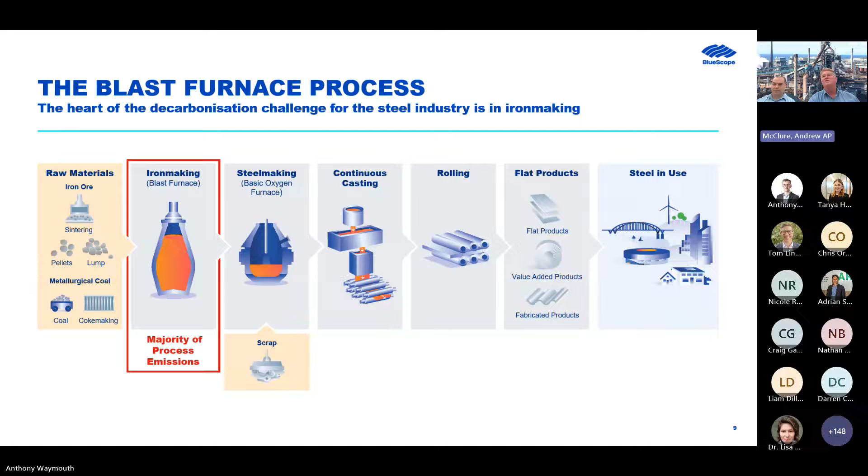And then long term, and Ian's going to talk a bit about the long term today, looking at direct reduced iron, and maybe some of the other things as well, but also the enablers that can help us get to that future technology pathway.

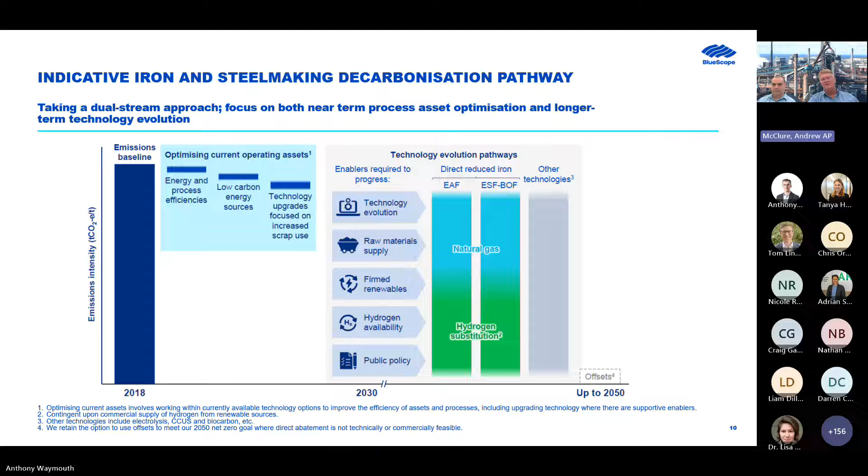Next, please. So now I'm going to talk about the project that we did with ARENA support to look at what things we could do on our decarbonisation pathway.

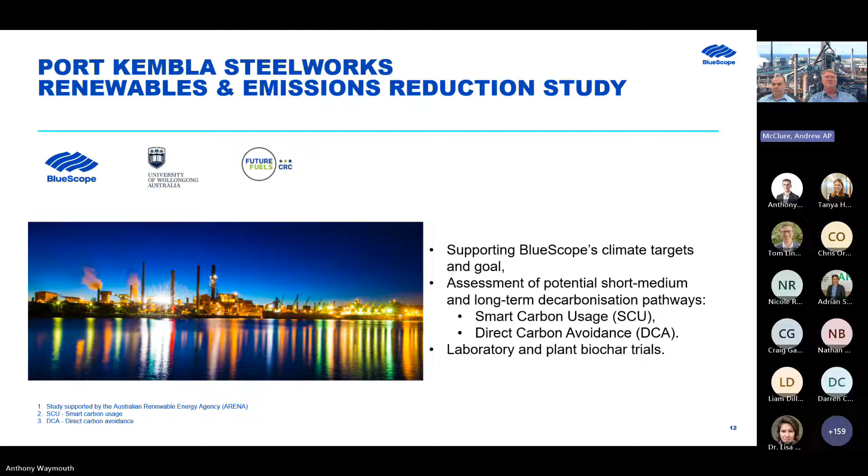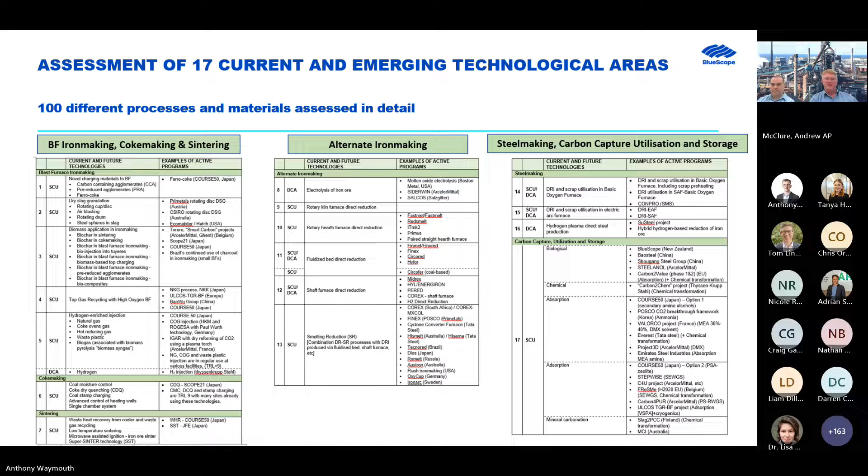Of course, we had over 100 different technologies to look at, and we worked to reduce that fairly quickly. We looked at the short term, in the sort of 15-year time frame, and because of that, we were able to say that if something's got a really low TRL, it probably means it's going to take 5, maybe 10 years to get going, which would impact its ability to help us in that short to medium term. Likewise, in the long term, we were really looking for technologies that would significantly reduce our emissions, and that helped us reduce the options we needed to assess further.

We got down to about 20 technologies that we then moved into doing detailed assessments on. We looked at the detail of each of those, but also at the operations, engineering, safety and environment aspects, and that helped us look at what we might do going forward at Port Kembla.

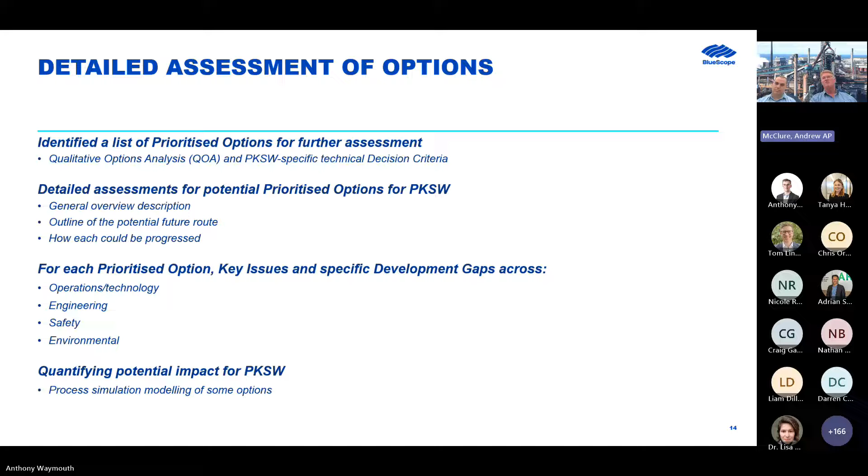Also, as part of the detailed assessment, we did some work on a simulation model, looking at options around hydrogen, coke oven gas injection, and different types of biomass. So we looked at biochar and also a torrefied charcoal type process, just to see how those injectants into the blast furnace would work, what the emission levels might be, and what levels we could actually inject into the furnace.

Out of that work, we've identified a few items to look at, understanding that we don't have unlimited resources. I suppose the three short to medium term ones are: looking at the potential to use HBI, hot briquetted iron, in the blast furnace, which we've picked up from the likes of Kobe Steel, who have done work using that for overall emission reduction in the blast furnace operation; looking at biomass, particularly biochar; and also wishing to look at more scrap utilisation in our operations, particularly in the BOF, an area where we've done a lot of work already but see more opportunities.

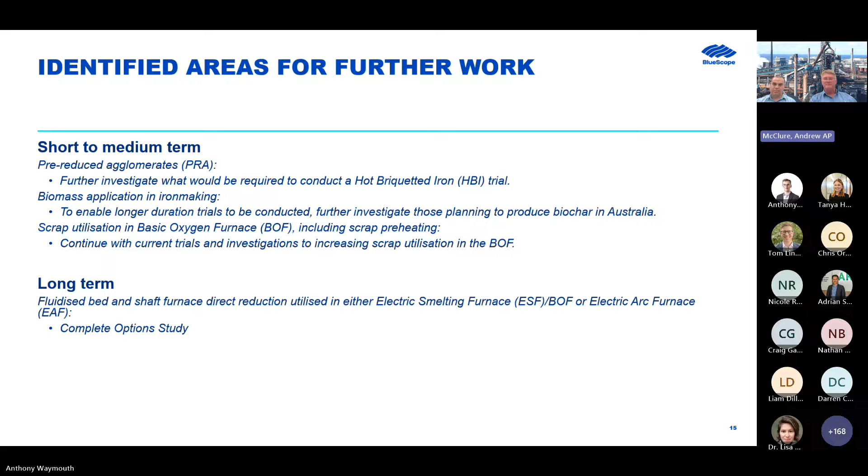In the long term, we are really focused predominantly on the direct reduction of iron, and Ian will talk a little bit about that.

As I mentioned, one of the focus areas for the study was around biochar use as a replacement for the pulverised coal we use in the blast furnace. A very quick explanation: we use coke and coal in the blast furnace. The coke is fed in through the top, and it's a very important part of the iron making process, helping the blast furnace breathe as material works its way from the top down to the bottom, and also providing the reductant and energy within the furnace. More recently, we've been able to use coal and inject it into the base of the blast furnace, which has been very effective in adding energy and also acting as a reductant.

So the idea of the biochar work was to pick up on the previous work that we had done with Worldsteel CO2 Breakthrough Project, which identified that biochar could work, particularly in PCI, but other areas too. We focused on PCI, and as part of this project, with Arena's support, we procured 1,000 tonnes of biochar. That was quite difficult - there's a limited amount of biochar, and certainly not a bulk supply of biochar in Australia, but we got 1,000 tonnes.

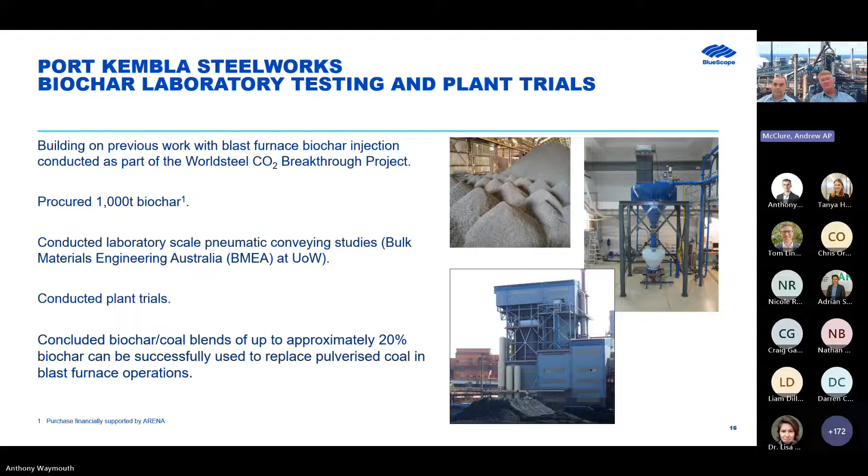So that's the biochar side of things. Next, please. So Ian's now going to talk about some of the future work we are doing, looking at that long-term decarbonisation pathway. Thanks, Andy.

Yeah, so I thought I'd just start quickly with the background of some of the different steelmaking technologies. I hope this is of interest to most people. There's really three main routes, and the dominant route worldwide is the blast furnace or integrated steelmaking route - that's approximately 70% of steel made with that route.

The other primary steelmaking technology is the electric arc furnace, where scrap is remelted to make steel - that's often called secondary steelmaking, and it's about 23%. The third option is direct reduced iron, which a lot of people are interested in at the moment, especially with using hydrogen. DRI is used pretty much where natural gas is cheap, which is in the Middle East and North America.

This ratio is very dependent on geography, I guess. In the US it's about 70% EAFs, and in China it's about 90% blast furnaces, due to the maturity of the country's industry, I guess. So there's more scrap availability in the US. Next slide, please.

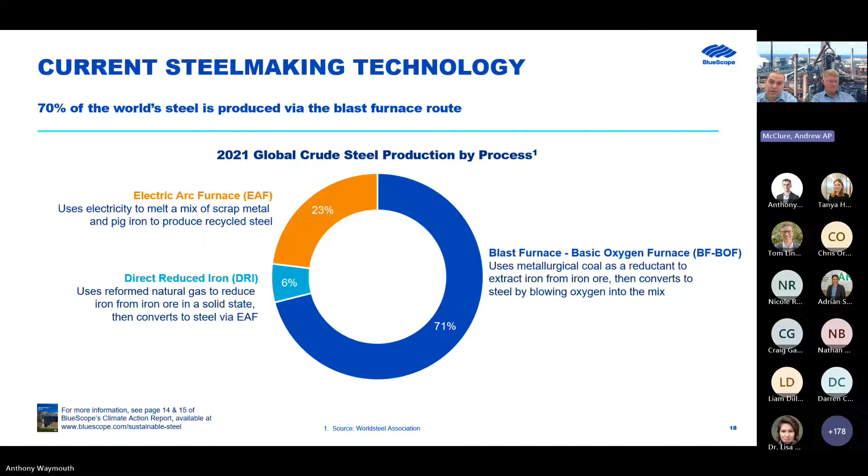The other mature technology is an electric arc furnace, which depends on the electricity greenhouse gas intensity. So depending on the amount of renewables in the grid, it's quite a lot less, from about 1/3 to 1/4 of the greenhouse gas intensity.

One of the big questions everyone asks is, why don't we at Port Kembla switch to an electric arc furnace? The simple answer is, we don't have enough scrap. We currently do import some scrap even now.

Looking forward, there's two different options. The most common one is DRI straight to an EAF, which needs magnetite, a little bit more expensive and less common. The option we're pursuing in partnership with Rio Tinto and BHP is DRI, an electric smelting furnace, and a BOF. The two advantages of that option are cheaper raw materials, and secondly, utilising existing infrastructure - we already have a BOF.

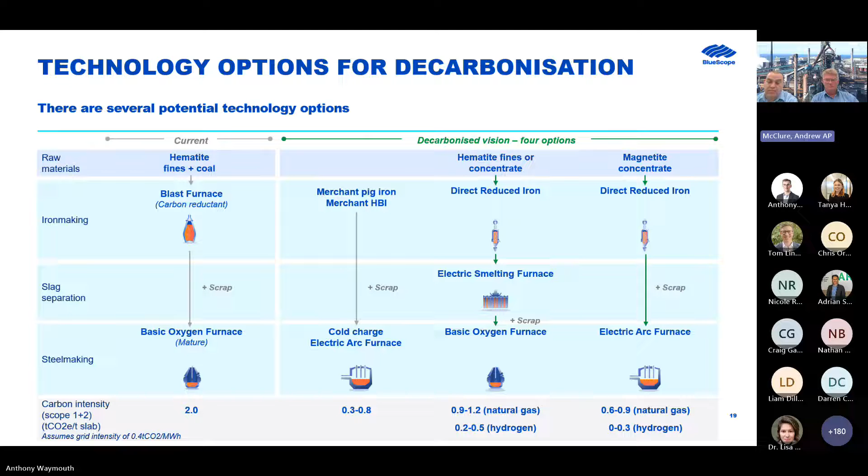Just to highlight this situation, the world needs primary steel, and it's going to need more and more steel over time. So there is a gap between the amount of scrap and the amount of steel we require. If someone converts to an EAF, someone else will have to produce more primary steel.

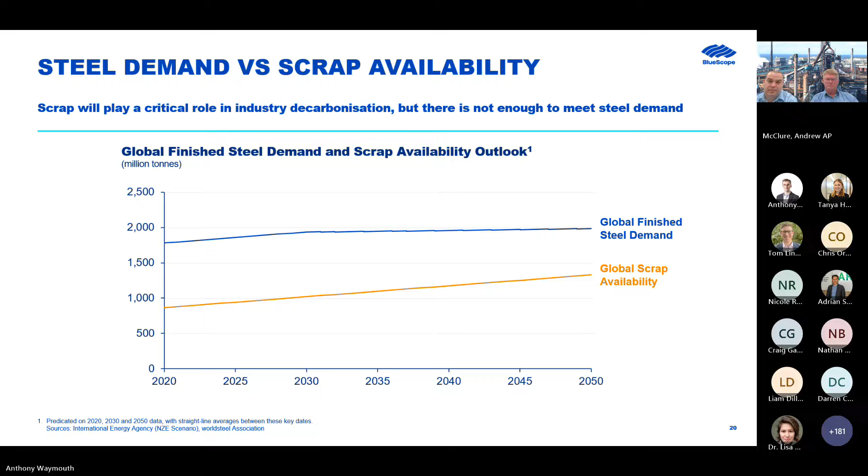It's been announced fairly recently that we're working with Rio Tinto and BHP to produce an electric smelting furnace, ESF. The whole idea is to trial Pilbara ores, using hematite Pilbara ores, in an ESF, which hasn't been done before, and it is really essential going forward. We're in very early days, but we're working through that at the moment.

I think this is the last slide, and it's a little bit controversial, but the reality is that natural gas DRI is a huge step down from a blast furnace BOF process. Hydrogen may well be the final step, but we don't want the perfect to be the enemy of the good, so to speak. You can get a 50 to 60% reduction moving from a blast furnace to a natural gas DRI process. That's the focus for us at the moment.

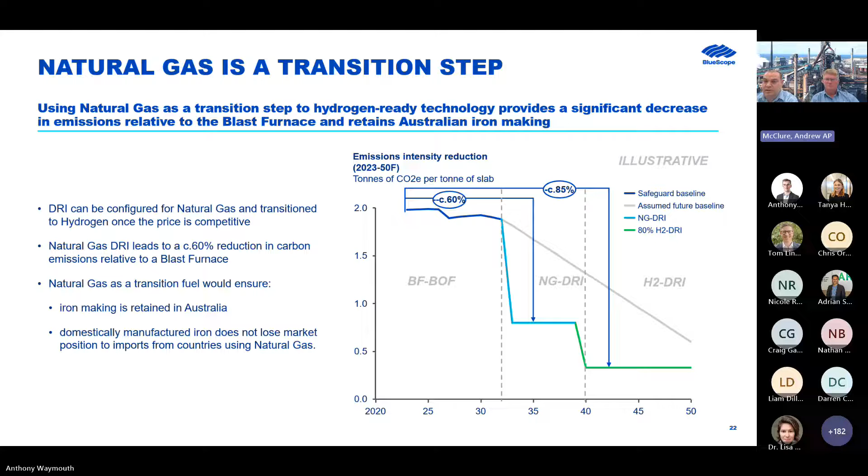And it's been talked about before, but for steelmaking, natural gas definitely is a transition fuel. It's something we really need to work towards, which is natural gas availability.

I have been working on biochar. It's probably half my role at the moment, trying to work out a source of biochar. It's a really easy option for us in that we don't have to reconfigure the existing steelmaking process.

The trial was very successful, as Andy mentioned. We had a 30% blend for 24 hours. That's not to say we can use it every day of the week, but it's certainly a very good thing, and it does make a significant reduction in our greenhouse gas emissions. At the moment there's no supply chain, as Andy mentioned, but we're working with several partners to try and make that happen.

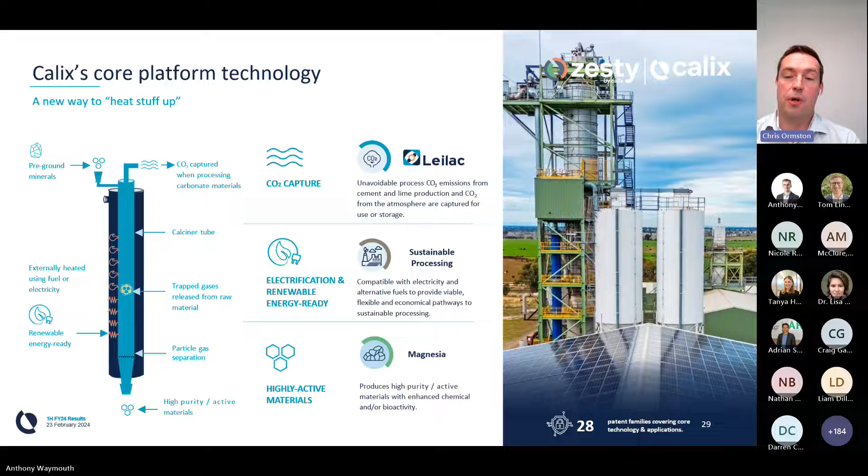Our platform technology is simply described as a new way to heat stuff up. The process vessel, or calciner tube, as you can see on the left there, is indirectly heated using fuel or electricity and is also renewable energy ready. Our facility here in Bacchus Marsh in Victoria is equipped with solar panels with sufficient capacity to fully power the pilot plant on renewables. In the process, pre-ground minerals are introduced to the top of the calciner and float down through the tube, enabling the thermal reaction to take place. High purity or converted materials exit the base of the tube, and any process emissions or off gases are captured from the top, depending on the application.

We've got multiple technology applications under various stages of development within the business. On the left-hand side, you can see a commercial magnesite operation here in Victoria, Australia, running since 2013. We also have our Leilac business processing cement meal and limestone, with facilities commissioned in Belgium in 2019. And of most relevance to today's discussion, we have our pilot facility in Victoria that's been used to develop the processing of various minerals, including manganese, spodumene, calcined clays, alumina, and in particular, iron ore fines by means of hydrogen reduction, which is the Zesty technology we're talking about in this presentation.

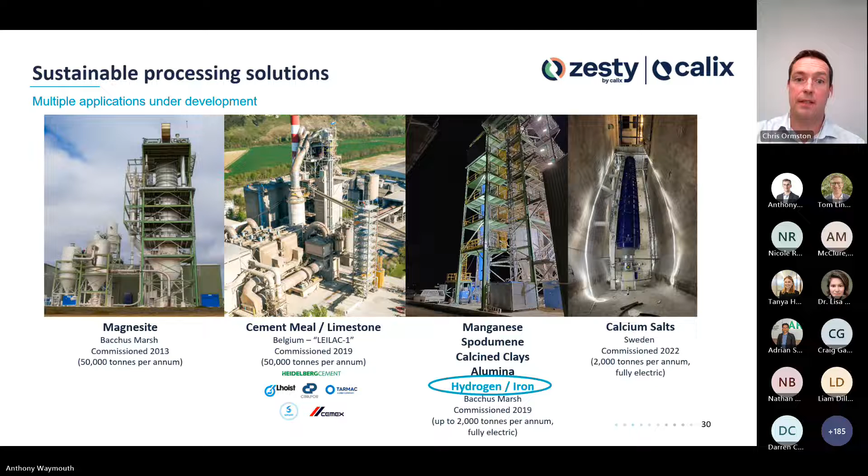So decarbonising iron and steel is a huge challenge, as mentioned in the previous presentation, with significant international focus. 8% of global CO2 emissions come from processing iron to make steel. 80 to 85% of those emissions come from the iron reduction step. And 53% of global iron ore supply comes from Australia, and within that supply, 96% of Australian iron ore is hematite.

So this highlights the relevance of the study work we've done to enable the development of a zero emissions iron and steel reduction technology that we call Zesty. So what is Zesty?

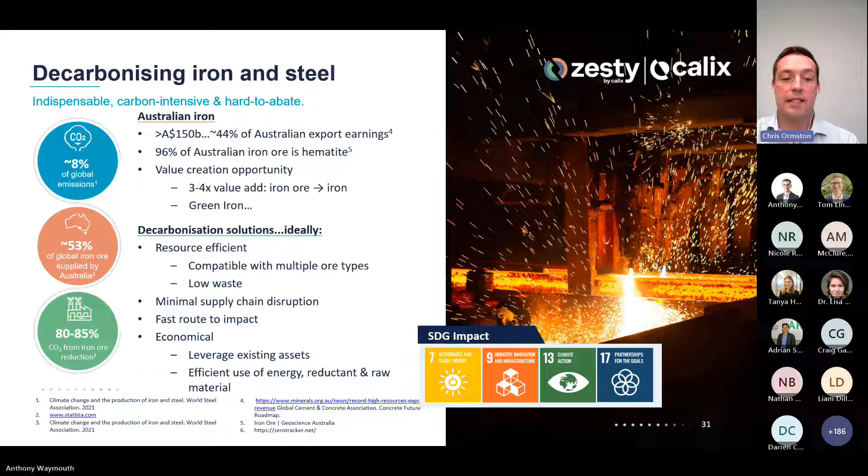Zesty utilizes the platform technology we have within Calix, described earlier, with the introduction of hydrogen to reduce iron ore. The process can be easily renewably powered. The indirect heating enables hydrogen to be used for reduction only, no combustion.

It's a fines-based process. The fines are introduced at the top of the process, and the hydrogen is introduced at the bottom and moved upwards. As the hydrogen moves through the vessel, it strips the oxygen from the iron ore as it passes in counterflow. The product exiting the process is a direct reduced iron product that's consumed in downstream steelmaking processes.

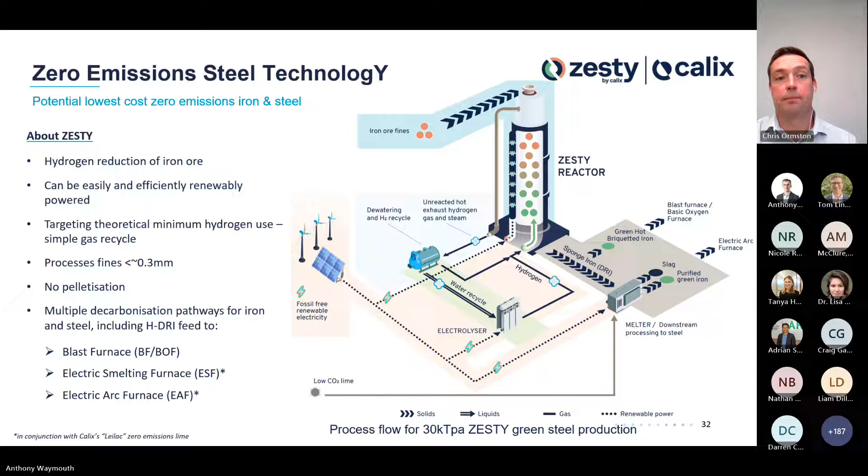Zesty technology is relevant to the entire steelmaking process. It can help decarbonize multiple processing pathways that utilize DRI, whether that be blast furnaces, where research has suggested that DRI can be used as 25 to 40% of the iron input, as Andrew mentioned in the previous presentation when discussing different feed mixes for blast furnaces going forward.

And also electric arc furnaces, where a combination of DRI and scrap can be utilized. As explained by Ian previously, the incoming ore type and quality is key here, given the operational tolerances of an EAF.

The Zesty process is less energy intensive than conventional iron making processes and has a much lower emissions intensity, due to the absence of fossil fuel-based fuels traditionally used for heating and reduction.

So I hope that provides you with an overview of Calix and where the technology fit is in the topic today regarding the feed study. Moving on to our feed study.

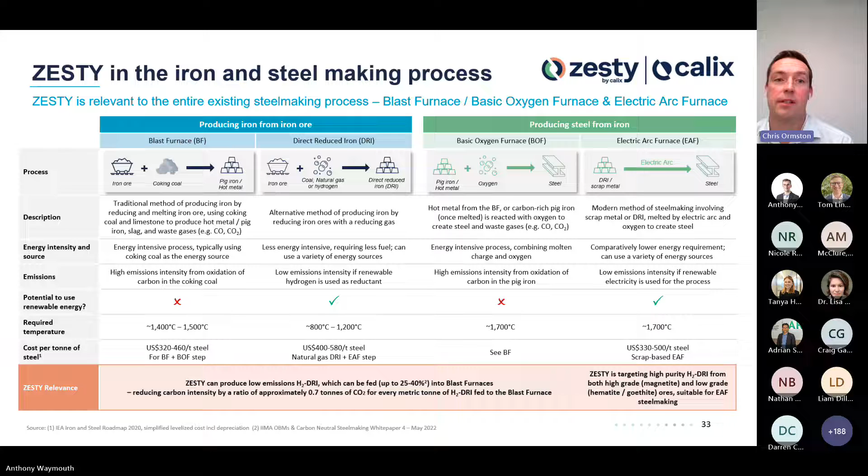The objectives of the feed study were to develop the engineering and design to a feed standard to deliver a 30,000 tonne per annum Zesty hydrogen direct reduced iron demo plant. This engineering and design has been supported by an expanded ore testing program at the Calix pilot scale facility in Bacchus Marsh, Victoria.

The purpose of the study was also to advance technical and commercial readiness of an alternative hydrogen-based DRI technology, and to deliver an estimate of the levelized cost of producing briquettes of hydrogen-based DRI using iron ore fines of low grade hematite or hematite goethite blends, typically found in the Pilbara here in Australia.

The objective of these studies is also to provide further knowledge to industry regarding the available H2 DRI technologies, and also to develop capital and operating costs that can inform the process for Calix to reach a final investment decision to go ahead and build the 30,000 tonne demo plant here in Australia.

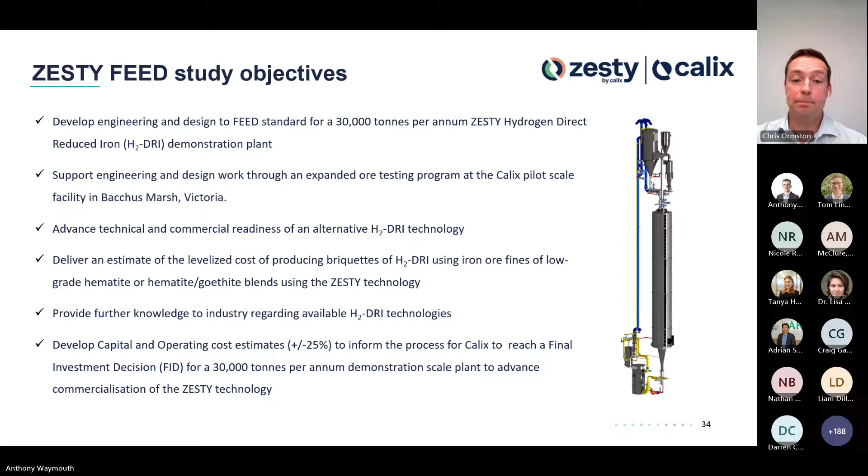Zesty can also reduce the emissions intensity of reducing iron ore the conventional way from around 1.89 tonnes of CO2 per tonne of iron to close to zero in certain applications.

Zesty has the ability to bypass traditional pelletizing, sintering, and agglomeration methods, saving considerable capital and operating expenditure. There's low consumption of green hydrogen because we don't use hydrogen at all for combustion, due to the indirect heating of the vessel. The hydrogen is only used for reduction, and hydrogen that isn't consumed can be recycled through the process. The indirect electric heating is a highly efficient heating method.

The Zesty process economics are expected to improve further as we scale the technology and reduce capital intensity, including the cost of carbon, which would further enhance the economics as those carbon costs are further developed in different parts of the world.

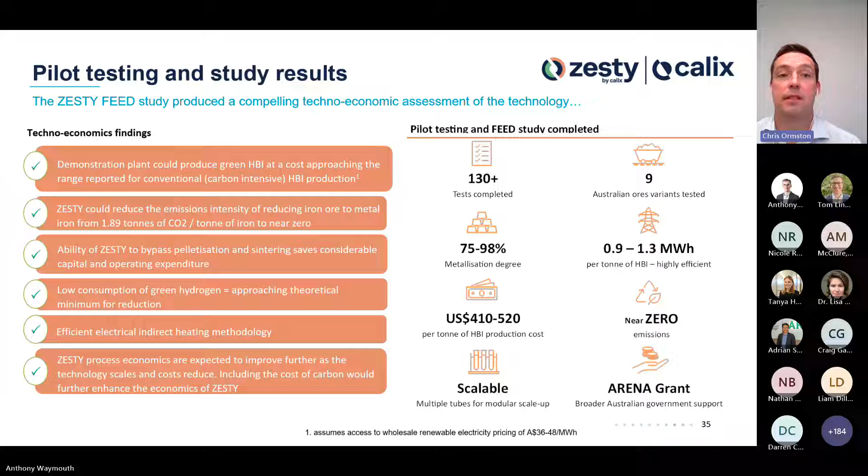There's always a few outlier results when undertaking testing, and these are typically associated with testing a few of the variables, making some tweaks in a pilot facility, such as changing the...

Temperature or the hydrogen flow rate. So we did 130 tests across 9 different ore supplies. We achieved metallization up to 98% in the higher case.

We used a range of low-grade ores as low as 53% iron. We processed iron ore fines with a range of 50 micron to 500 micron. The system can be tuned.

There's a number of conditions we can adjust to achieve commercial grade hydrogen-based DRI. Our pilot scale facility is an 18-meter vertical tube, and we've calculated that the demonstration facility would be around about 36 meters. It's worth noting that the pilot facility we have in Bacchus Marsh has not been custom built for hydrogen reduction. It's been used, as I mentioned earlier, as a multi-purpose facility for different mineral applications.

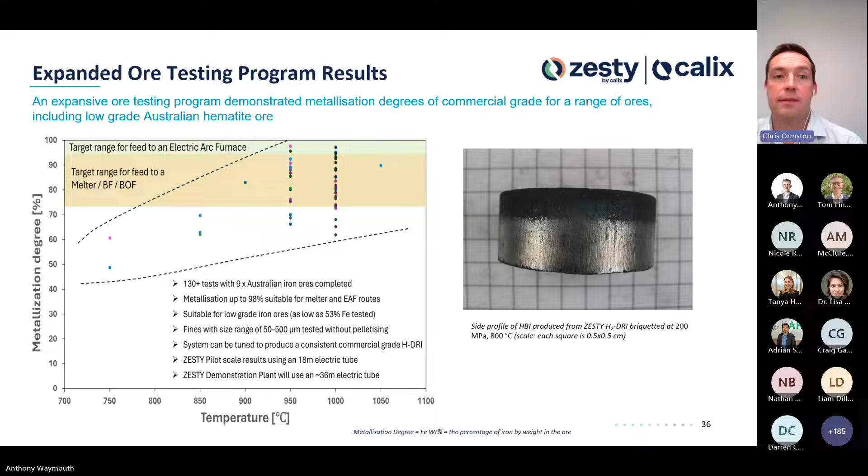So other key highlights and findings from the study confirm a process system with flexibility designed to accommodate a wide range of iron ore feedstocks.

Zesty's low cost of production is driven by efficient hydrogen use, efficient electrical heating, and the elimination of additional steps to achieve an H2 DRI product.

The feed study and cost estimations considered two operating scenarios. One would be over-the-fence supply, so a potential location near hydrogen hubs being developed within different states of Australia, but also the fallback alternative of an in-house electrolyzer within our own project development.

Total energy requirements of the process are projected to be 4.2 to 4.6 megawatt hours per ton, inclusive of the hydrogen production requirements. Hydrogen production requirements are approximately 75% of total power, with the remaining 25% used for the indirect heating of the vertical furnace.

We've also undertaken sizing and specification of the roller press to allow production of HBI, as you see from the samples we've generated. Those products can be tested in downstream steelmaking processes. As I mentioned, the initial briquettes are highly encouraging.

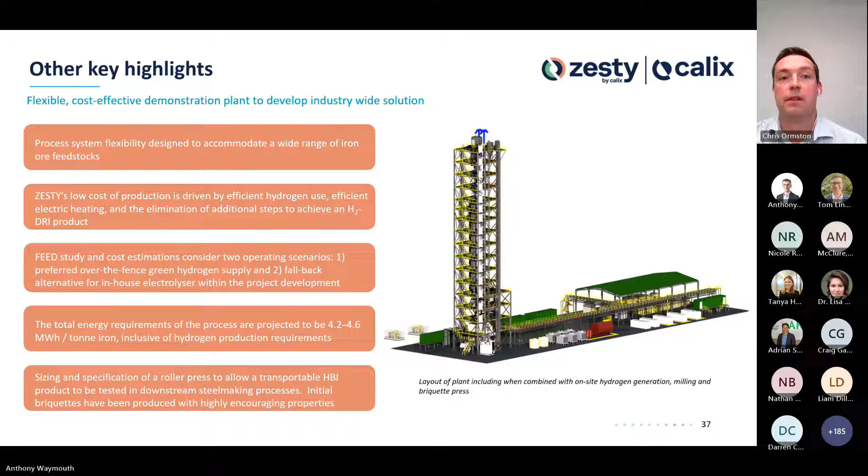So the feed study program has been a critical activity for us towards FID for the 30,000 ton facility. Why 30,000 tons? We see a 30,000 ton nameplate as a representation of a full-scale implementation of a single reactor tube, and that will...

Form the basis for further scale-up, which is essentially repeatable modules in multi-tube configurations. The demonstrator will be capable of producing significant volumes of hydrogen-based DRI for further downstream testing in the steel production value chain.

And this demonstrator provides a great opportunity to align with other downstream melting developments, as described in the previous presentation, that are currently underway in Australia, providing bulk quantities of DRI and HBI feedstock to support the development of green iron and steel production domestically.

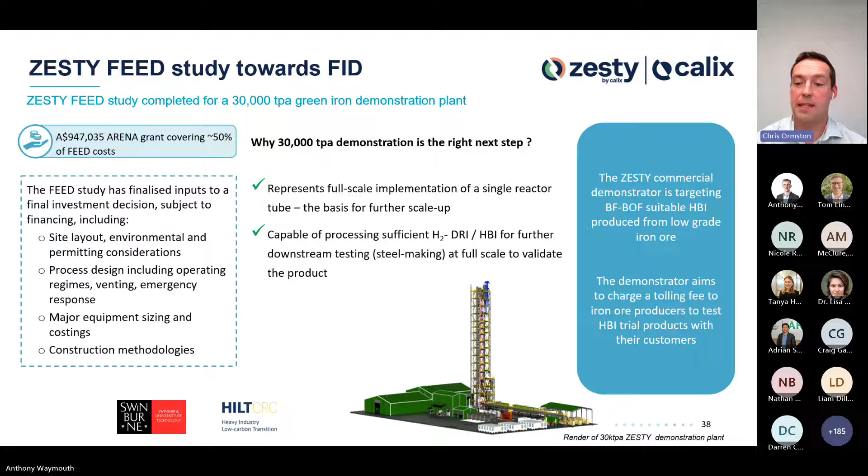So on to the next steps. The study confirmed CapEx and OpEx figures for an operational demonstration period. Those figures remain confidential, but the next steps include finalizing site location, complete with the required access to power utilities...

And hydrogen production, achieving our FID supported by required funding structures, continuing the development of the pilot testing that we will continue to do at the current scale we have available to us in Victoria, and then further enhanced with this demo plant. So completing engineering, procurement, construction activities...

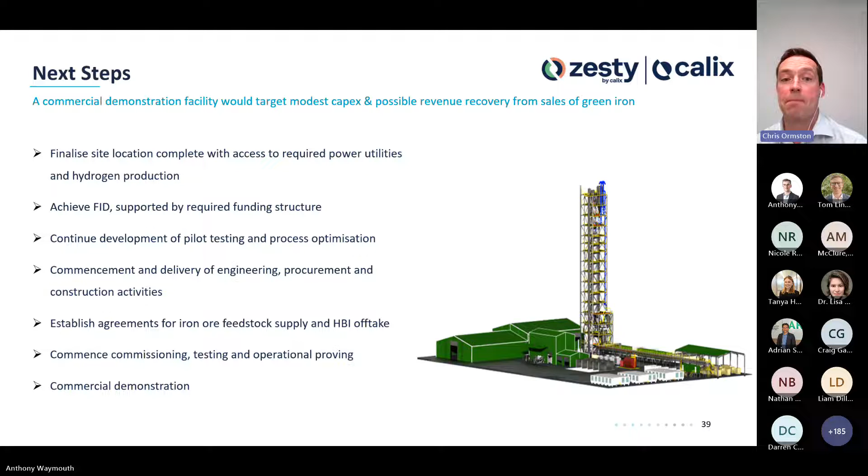And also establishing agreements with industry partners for the supply of iron ore and also potential offtake for the HBI for consumption downstream. After a period of building, then we'd go on to commissioning and a decent period of operational proving.

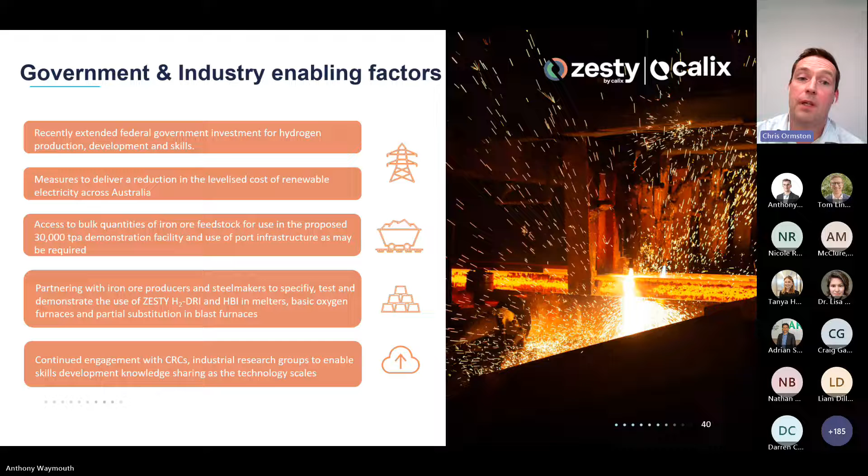So finally, I'd like to take the opportunity to identify further enabling factors for an operational demonstration plant that requires support of government and industry. We're certainly delighted with the recent news last week for extended federal government investment for hydrogen production, development and skills across Australia. We'd also require measures to deliver a reduction in the levelized cost of renewable electricity across Australia. And we also need bulk access to bulk quantities of iron ore feedstock for use in the proposed facility, and also potential use of port infrastructure as may be required depending on the location. We'll continue to partner with iron ore producers in both upstream and downstream, with the iron ore producers in Australia and also overseas, and the steelmakers.

And also, finally, to close, I'd like to thank our partners that have been with us on this journey to date, and also thank you all for attending today and listening to this presentation.

Thank you, Chris. The Zesty technology definitely seems to be very promising.

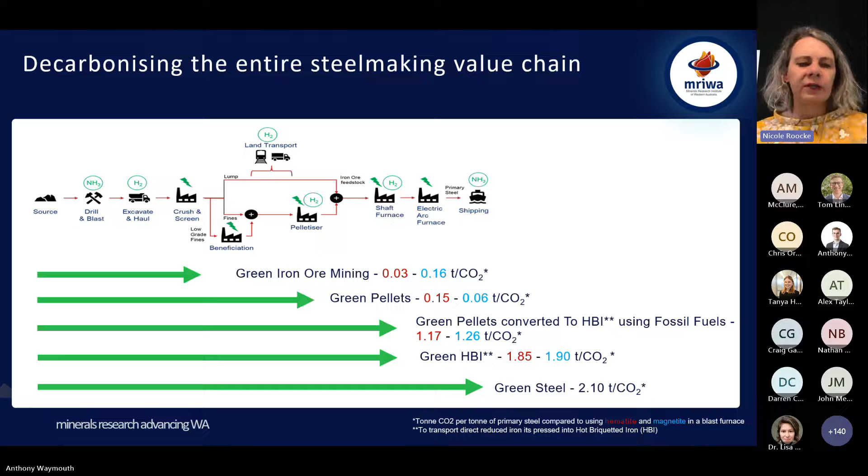When we looked at the various decarbonisation options, we certainly looked at where there was opportunity to replace fossil fuels in that supply chain. We looked at opportunities in power generation, transport, and various other items on the screen. By far the greatest opportunity for the steel industry to decarbonise is through finding alternative uses for the replacement of fossil fuels in blast furnaces in steel production. Certainly some of the discussions and presentations by Calix and BlueScope show this is where their key focus areas are - finding alternative solutions to that.

Of those options, where we looked at the potential use for green hydrogen was certainly in and around using it as an alternative fuel for transport, as an alternative and replacement for sintering to produce green pellets, as an alternative in the blast furnace in steel production, but then also looking at it in the option of using a greener iron product as well. So you can see that the different options have different implications or opportunities for change, but they also come with quite significant capital requirements and significant technology changes.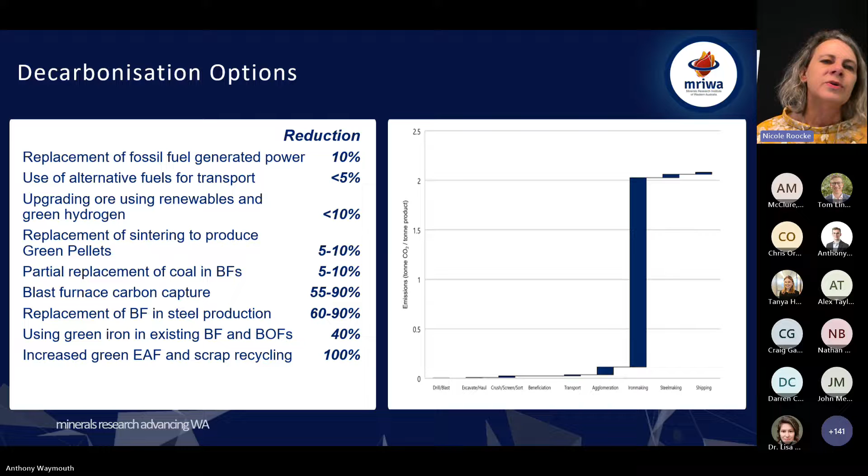Just moving on to capital requirements. What we looked at as part of our work was being able to understand what it would take to support the onshore processing of our iron ores here, and across all of the different categories, what were the capital requirements for that?

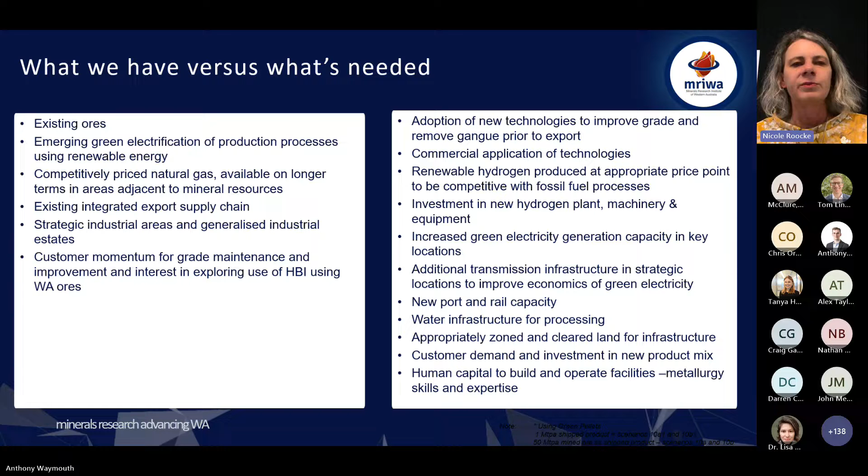If I just move on, looking at what we're doing, what MRIWA currently has underway. We're currently doing a pre-feasibility study into a flexible iron making pilot plant, and have been having a number of discussions with different parties to understand what is needed to trial and blend Western Australian ores and their suitability for use in other processing options, whether it be electric smelting furnaces or electric arc furnaces.

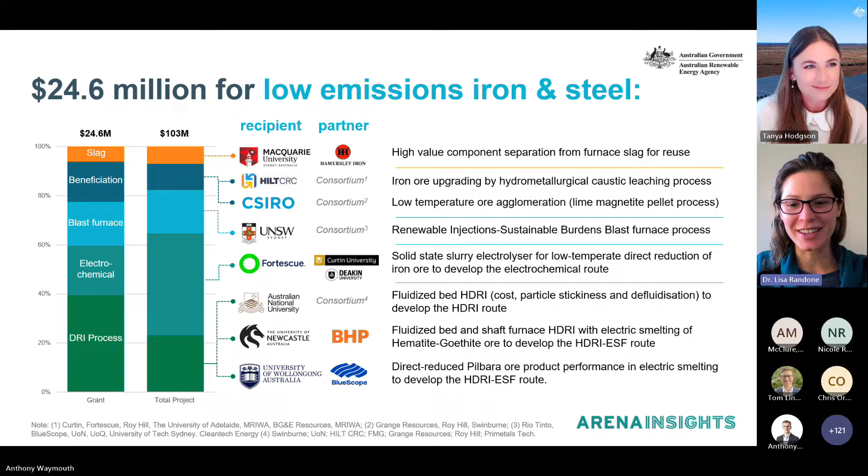Thank you, Tanya. Definitely many promising technologies are currently being tested in Australian labs. And to your point, yes, we definitely hope to see all of them, or at least most of them, commercialized in the market in the next few years.

In terms of having more information about projects, first of all, we are lucky enough to have some of our project recipients online today who might be able to jump in and provide additional context and comments. Also, in the next few weeks, we will publish on our website, on ARENA Knowledge Bank, the first digital research poster from each project. They are at the very beginning of their journey, so probably not able to share many results at this stage, but at least you can go and have a look in a bit more detail at what they're planning to do, their research plan, and what kind of challenges they're trying to address. So stay tuned - in the next few weeks they should all be online for you to check.

So I guess we're now at the final Q&A section, and I can see there are already a few questions in the Q&A box. I'll try again in case someone is brave enough to lift their hand and come off mute - we always have that opportunity. But in the meantime, maybe I'll kick off with one question that I was pretty interested in.